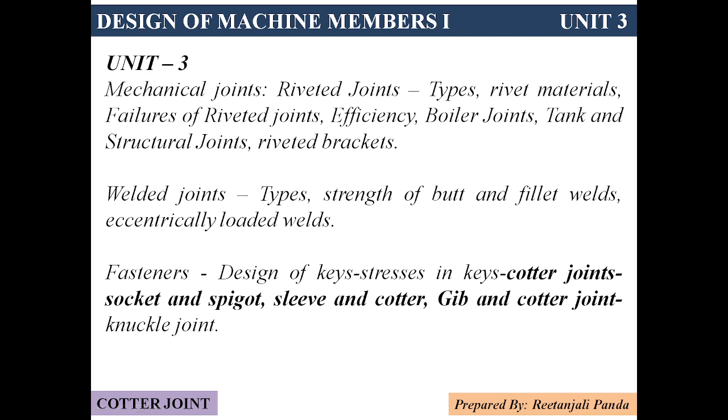In the previous class, as we learned, there will be a socket and a spigot going inside the socket, and we were using the cotter pin. But in this case we are having shaft 1 and 2 which is going inside the sleeve, and then two cotters are used to make those two shafts fixed in that position.

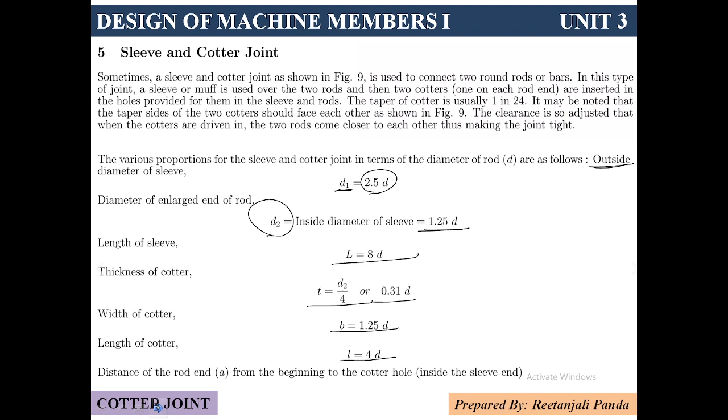Similarly, width of the cotter B will be equal to 1.25D. Length of the cotter will be equal to 4D. The distance of the rod end from the beginning of the cotter hole inside the sleeve - here we can see this is A, which is from the end of this cotter to the starting of the sleeve. Similarly, from the end of the cotter to the end of the rod is C for both sides. So these are the proportions we have to remember.

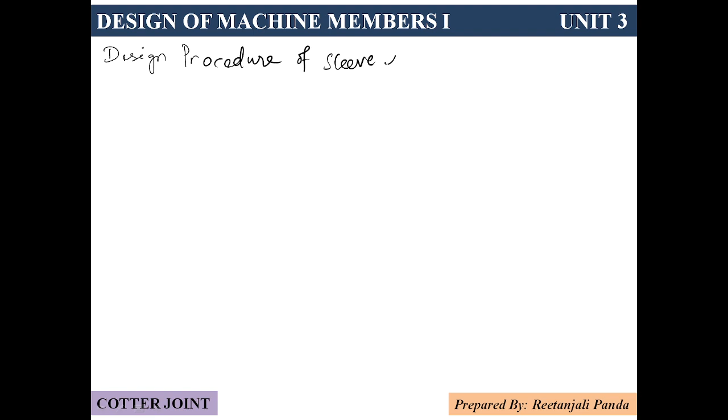Now we will see the design procedure of this sleeve and cotter joint. So what will be the first thing we have to see? We have to see how the rods are going to fail if the tension load is applied on them. So here we will consider step 1.

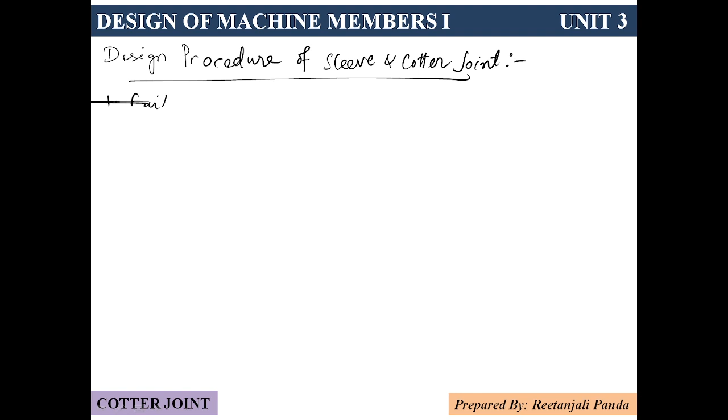Where it is going to give us the idea of failure of the rod in tension. The rods which are supposed to be joined, that is called failure of the rod if tension force is applied on them.

Then what we know here? We know that the area of the rod is equal to pi by 4 d square. This is the area of the rod.

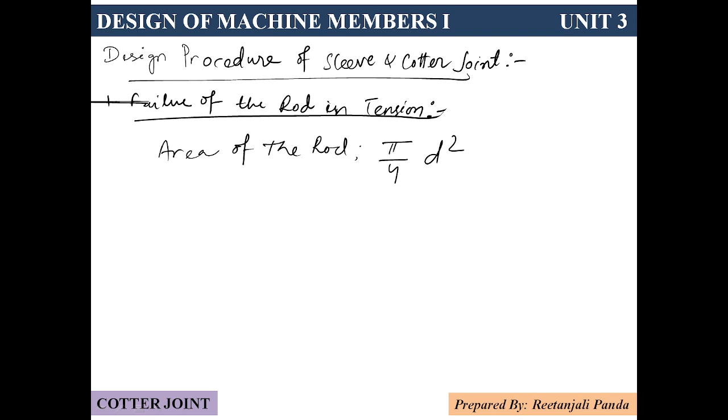Similarly, if we are applying the tension force, and its permissible tensile stress is sigma t, then how much tensile load it can handle? The tearing strength of the rod P is equal to pi by 4 d square, the area, into permissible tensile strength.

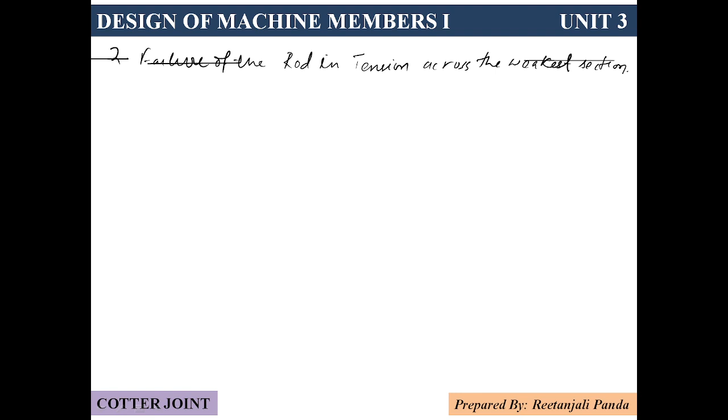The area where we have made the hole for the cotter here. So out of the total area of the rod, suppose this is the rod, in this rod we have made this hole for the cotter. Then the area at this whole section will be how much? The area of the rod minus the area of the hole we made for the cotter. So we can say weakest area of the rod.

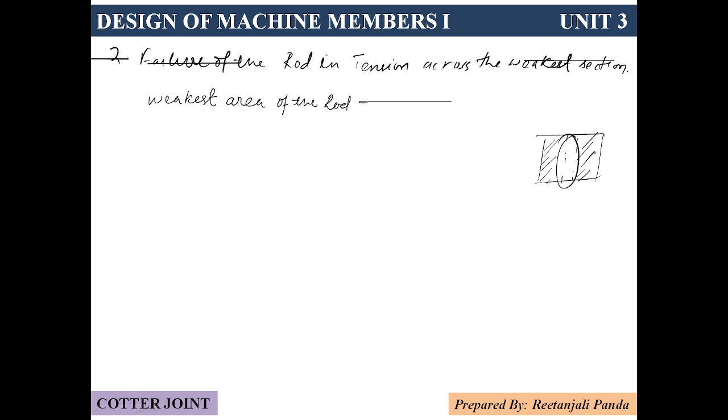Weakest area of the rod will be equal to how much? As I told you, total area pi by 4 d square minus the area of the cotter, that is d2 into t.

This is the weakest section, where we have made the weakest section, we have made in the area where the cotter hole is there. Cotter hole is where? The cotter hole is made for the inside diameter or the smaller diameter of the rod, so it should be d2 into t. So this is the weakest section.

If we want to find out the strength of the weakest section, then P will be equal to area into stress. So area is equal to pi by 4 d square minus d2 into t, into sigma t. So this is the failure in this case. If we know the value of P and t, we can find out d2, which is the value we need for the dimension.

Clear? Now here, if we want to find out d2, then we have to take the t value. So we can assume here t is equal to d2 by 4. Then it will be easy for us to find out the value of P. Also we can find out the value of d and d2 and t.

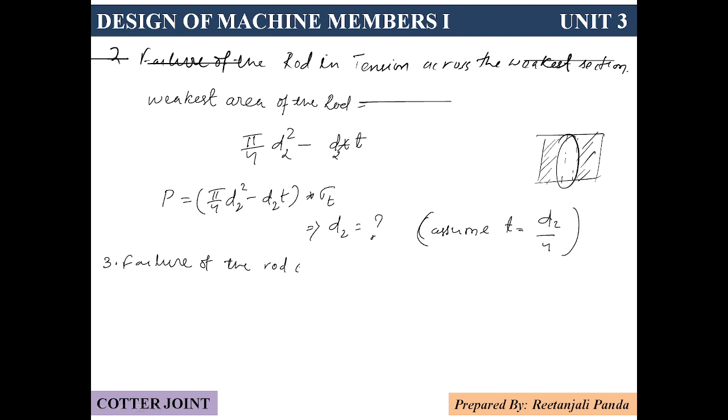In this third step, we can say failure of the rod or the cotter in crushing. Now we know that where the crushing will be there, crushing will be there where the cotter is. So if we consider the area of the cotter, then we can say area that resists crushing is equal to d2 into t. Now crushing strength is equal to area into crushing stress.

Already we know d2, t and p value. Now we can find out sigma c here, how much we are getting, and check whether it falls in safe region or not. If it falls in safe value, then the design is acceptable. If not, then the design have to be reconsidered.

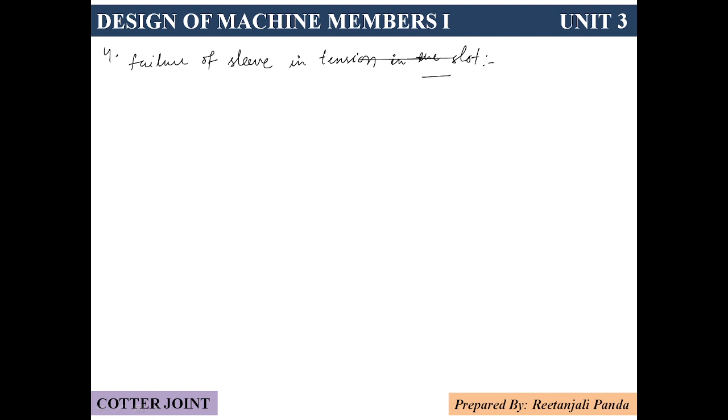That area which is resisting, that area where the slot is present in the sleeve. So to find out the slot, since this is a hollow shaft, the hollow shaft area will be equal to pi by 4 outer diameter square minus inner diameter square. So that will be the area of the hollow shaft. Out of that we are going to remove the portion where the hole for this cotter is done.

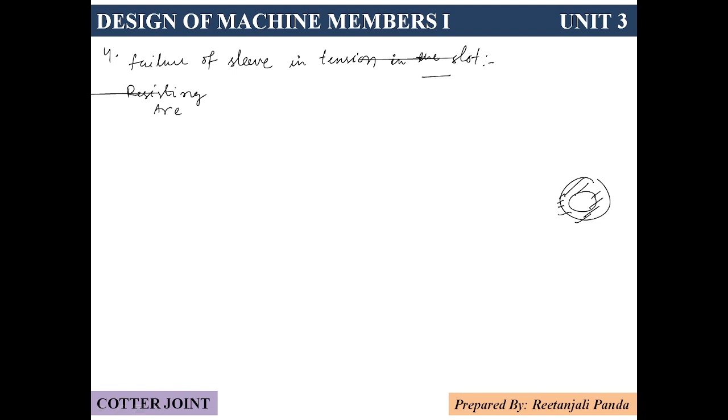So we will be getting the resisting area equal to pi by 4, d1 square minus d2 square. This is the area of the hollow shaft, minus d1 minus d2 into t, where we made the hole for the cotter pin. Now the strength will be equal to how much?

P will be equal to area into the sigma t value. So area will be equal to pi by 4, d1 square minus d2 square, minus d1 minus d2 into t. This whole is going to be multiplied with sigma t. Here, what we can find out is the value of d1.

Clear? This is step number 4. In step 5 what we will do is check the failure of the cotter that is due to shear.

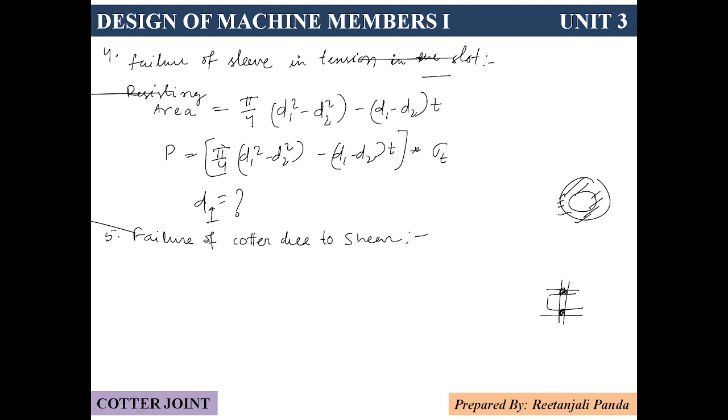Failure of cotter due to shear. Now, where will the shearing occur? The shearing will occur in the cotter region. And how many areas will have shearing? Two areas, because the cotter has the sleeve area and also the shaft area. So the junction point of sleeve and shaft, both at the top and bottom, will experience shear. That's why we have to take double shear here. If we take double shear, it means double area, therefore resisting area will be equal to

area will be equal to 2 into width of the cotter into its thickness, b into t. Now what will be its strength? Its strength will be equal to, because it is going to fail in shear, we have to consider the shear stress here. So P is equal to 2bt into tau. Here we can find out the value of b.

Now, in the next step, what will we do? We will consider the failure of the rod end in shear. Failure of rod end in shear. If we consider this, we have to determine which area in the rod end is experiencing the shearing stress. So which area is considered here? If we go for the diagram, you can see here.

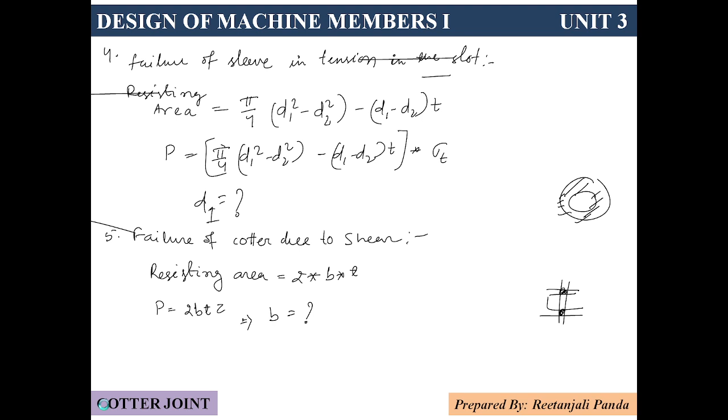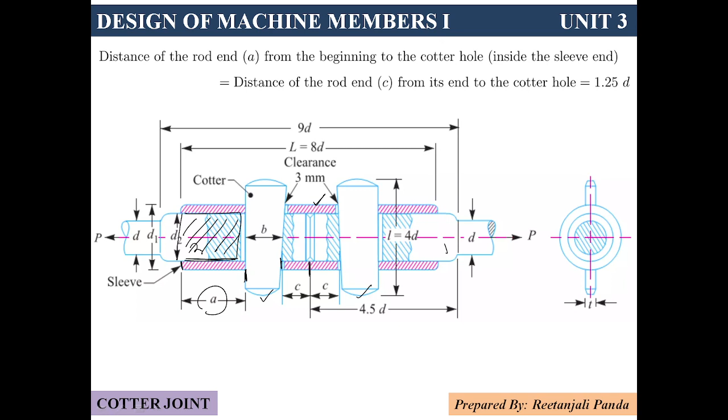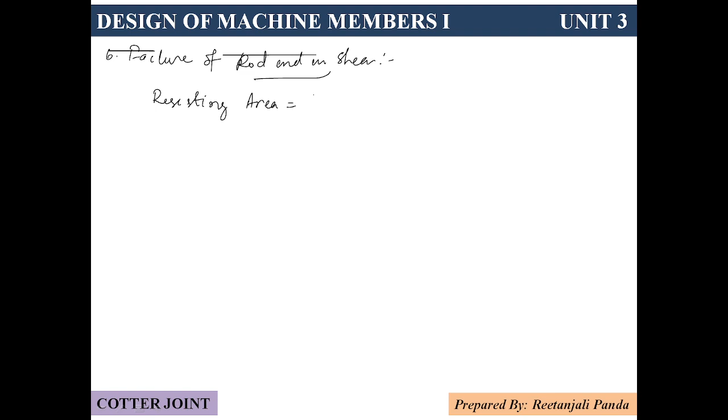In this diagram, this is the rod end where shearing will occur, in this region of A. Which area? This area is going to experience the shear. So if we consider this area, then we can find out the strength. So here I can say resisting area is equal to 2 into A into D2. This is the area where shearing of the rod will occur.

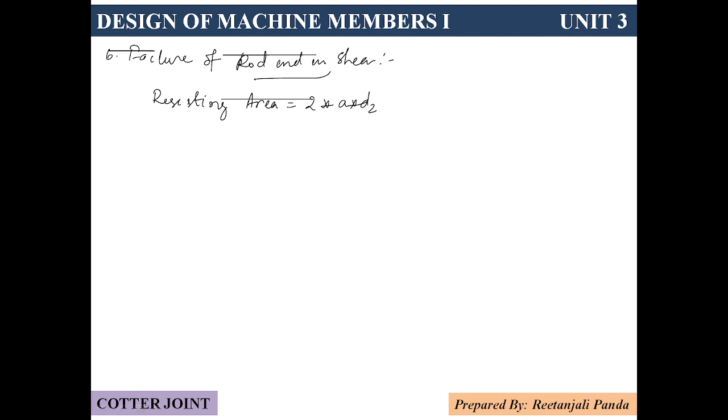Now for finding the shearing strength, P will be equal to 2 A D2 into tau. This is the shearing area, the area where shearing will occur, and in this case we will be able to find out the value of A. Similarly, in the 7th and last step, we will consider the failure of the sleeve in shear.

So the area for this will be equal to how much? I can say resisting area is equal to how much? Resisting area is equal to D1 minus D2 into C, and here also double shear, so 2 into C into d1 minus d2. Therefore, the resisting force P is equal to area into tau. I can say P is equal to d1 minus d2 into 2C into, since it is a failure in shear, tau.

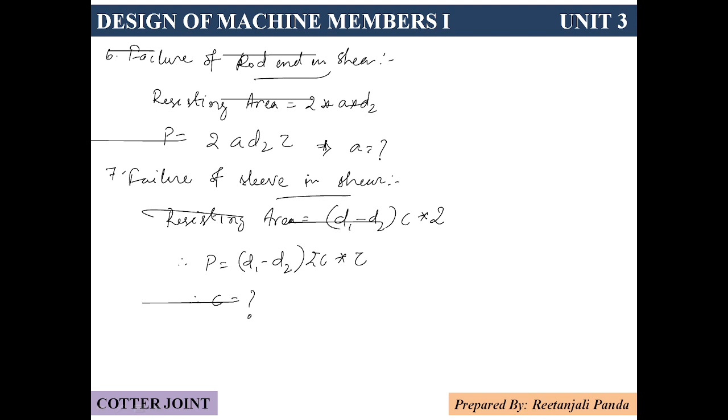So here what we can see, in this case we can find out the value of C. So all our dimensions are claimed here. So the design is over. Now we will see a problem.

So this is the question given here. Design a sleeve and cotter joint to resist the tensile load of 60 kilonewton. All parts of the joint are made up of the same material with the following allowable stresses: sigma T is equal to 60 megapascal, tau is equal to 70 megapascal, and sigma C is equal to 125 megapascal.

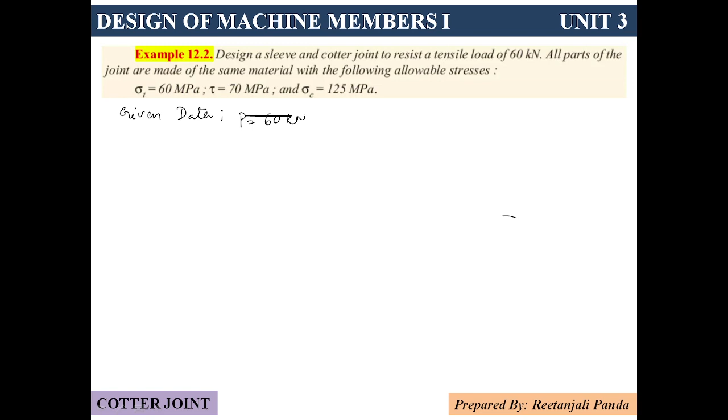So I can say what the given data here is: P is given as 60 kilonewton, sigma T is given as 60 megapascal, tau is given as 70 megapascal, sigma C is given as 125 megapascal. Now, what we have to find out is the value of different parts of the sleeve and cotter joint.

So we'll go for the first step. In the first step, what will we find out? We will find out the diameter of the rod. For the diameter of the rod, what formula do we know? P is equal to pi by 4 d square into sigma t. Now we know P is equal to 60 kilonewton, converted into Newton, is equal to pi by 4 d square.

D is not known to us, and we know the value of sigma t is 60. Therefore here D will be equal to how much? We will be getting 35.7 around. So we can take the next even number, that is 36 millimeter. This is the first step we got.

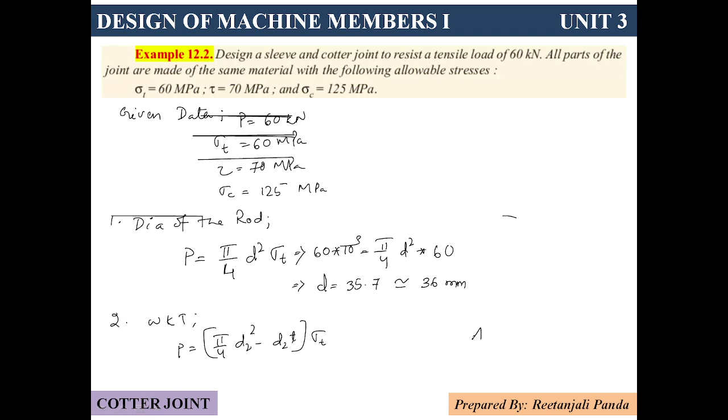So in the next step, what we will find out? The diameter of the enlarged diameter. Right, so for enlarged diameter, we know that in the second step, P is equal to pi by 4 times d2 square minus d2 into T, into sigma T. I can say assume T is equal to how much? We can assume that T is equal to d2 by 4, or we also know that t is equal to taken 0.31 of d.

Right, so we are not going to go for that complicated one. We will directly get here that 60 into 10 to the power 3 megapascal in Newton is the value of P. Pi by 4 d square is not known to us, minus instead of t we put d2 here, is equal to, instead of t if we put d2 by 4 here we will get d2 square divided by 4 into sigma t, the value of sigma t is 60 megapascal, right?

Now here we can get the value of d2. Let's find out how much we are getting d2. So we will be finding out d2 is... we got 20, 43.2. d2 we will get 43.2 approximately. Next even number 44 mm.

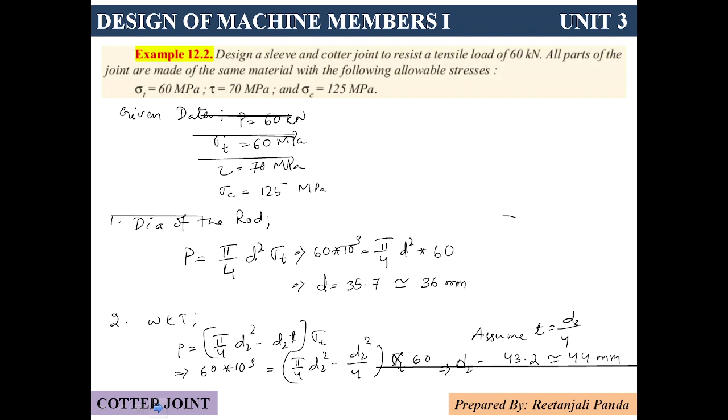If d2 is equal to 44 mm, then t is equal to 44 divided by 4 is equal to 11 mm. Okay, now we will check this value with the crushing strength.

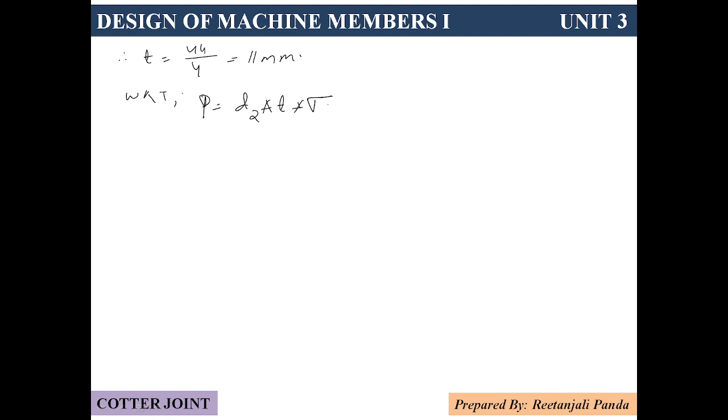So we know that for crushing strength the formula is equal to P is equal to D into T into sigma T. So D2 into T into sigma C. So here we will get sigma C is equal to how much? Sigma C is equal to 123.96. So we will get 123.96 which is almost equal to 124.

Which is almost equal to 124 megapascal. How much is given to us in given data? In given data it is saying sigma C should be 125 megapascal and it is falling below that, right? It is below 125 megapascal given data. Hence our design is safe and we need not recalculate.

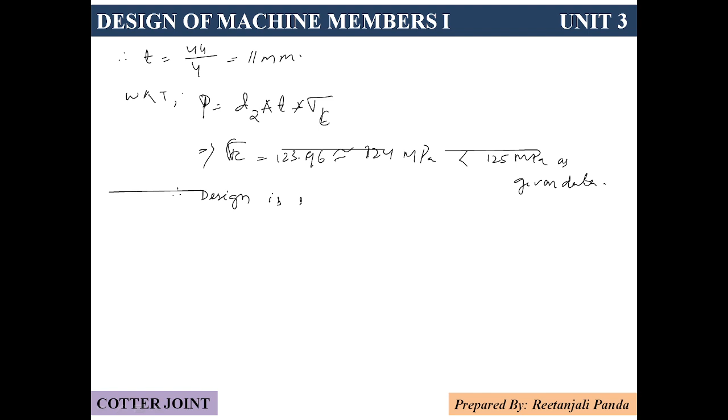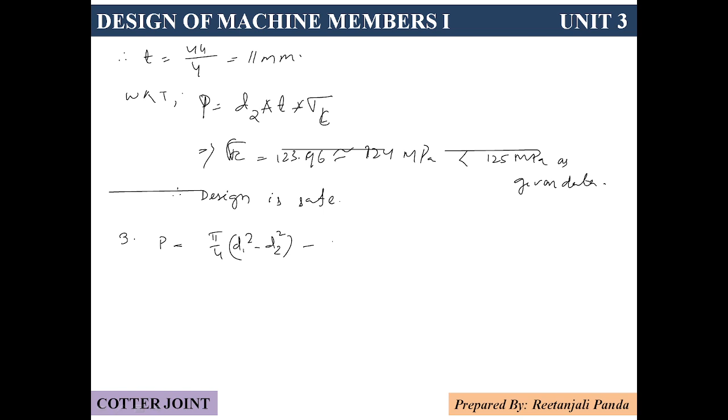Or calculate the dimensions again. Now we will find out the outside diameter of the sleeve. To find out the outside diameter of the sleeve, what we have to take is the formula. In the third step, we can take the formula P is equal to pi by 4 times d1 square minus d2 square, minus d1 minus d2 into t,

and this whole is going to be multiplied with sigma t, right? So here we will get the value of d1 because we already know P is equal to 60 into 10 to the power 3 is equal to pi by 4 times d1 square minus d2. We found out d2 is equal to 44 mm, right? Minus 44 square, minus d1 minus 44 into 11.

This whole is multiplied with sigma t is equal to 60. So here by applying Sridhar's rule, we will be able to get the d1 value as 58.4, suppose 60 mm. This is the diameter of the sleeve we got, outside diameter.

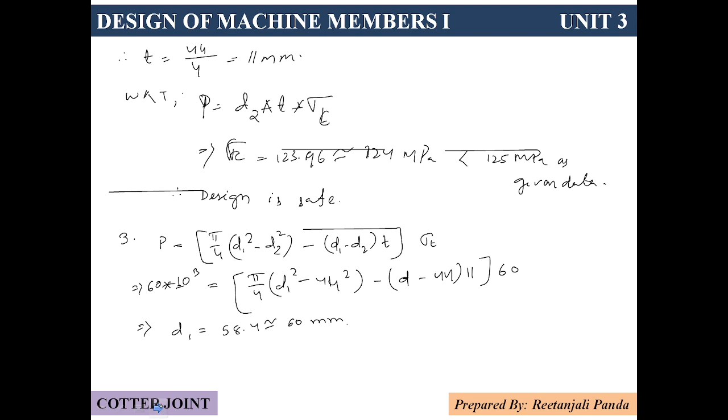Now we will find out the width of the cotter. So to find out width of the cotter, we have to make sure that the shear strength of that cotter should be equal to the maximum load applied. So we can say P is equal to 2B into T into tau, which is equal to B will be equal to P, which is 60 into 10 to the power 3 divided by tau is 60. Sorry, tau is equal to how much? We got 70. Tau is equal to 70.

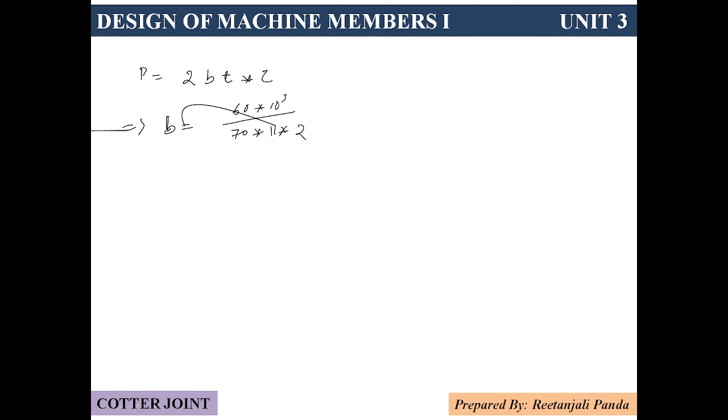70 megapascal into T we got 11 and 2. So we will get B is equal to how much? We will get B is equal to 38.96, almost equal to 40 mm.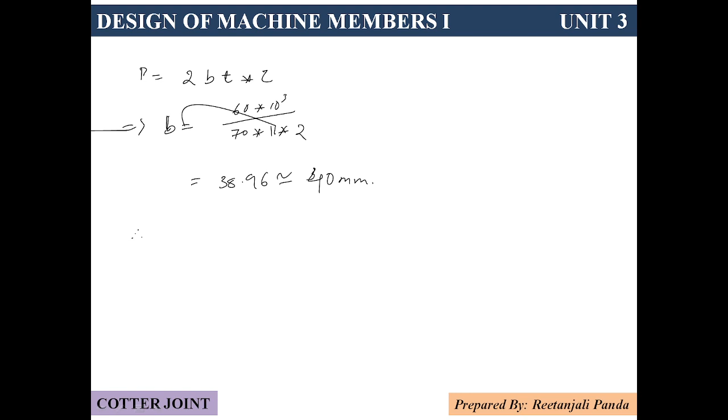Okay, now we will find out the value of A and C. For finding out A, again we have to consider the double shear in the rod. Now, therefore, now we know that P is equal to 2A into D2 into tau. So A is equal to P, 60 into 10 to the power 3 divided by 2 into D2 44, tau is equal to 70. How much do we get? We will get here suppose 9.74, which is supposed to be equal to 10 mm.

Similarly, P is equal to how much? We know that P is equal to 2 into d1 minus d2 into C into tau. Here again by putting all the values other than C, we get C is equal to 26.78, supposed to 28 mm.

Here ends your cotter joint with sleeve and cotter joint. Okay, I hope you have understood this one. If any doubt, you can WhatsApp me. Okay.